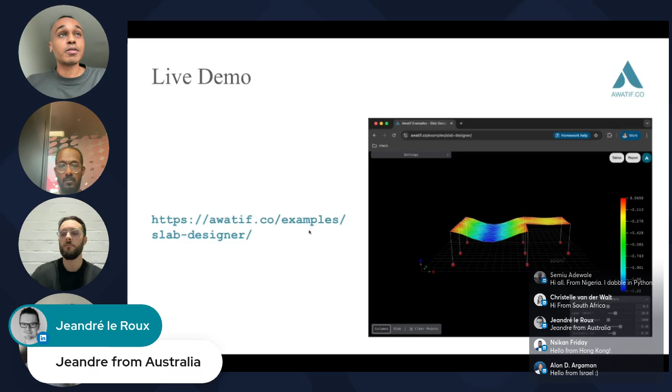The good thing about Awatif is it's web-based. If you just type awatif.co in any browser, even on your phone, you can access our app. There are many examples, like curves or buildings, but we have this slab designer which encompasses a lot of the ideas and concepts we want to bring. I'll go through it a bit faster than usual.

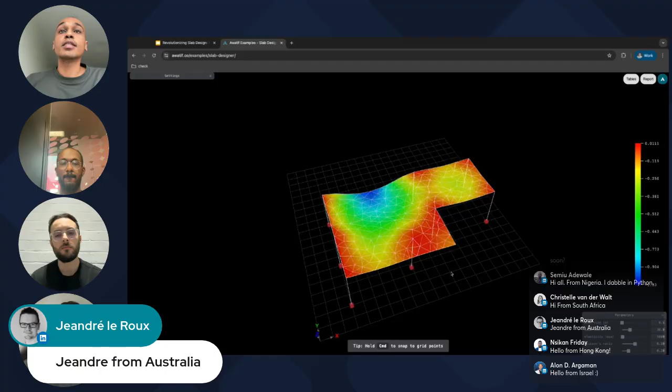This is a slab supported on columns, and here I'm showing the deflection in the Z direction - typically one of the first checks you do. The nice thing about this platform is that if you change the column location, the analysis is done in real time. We're talking about FEM analysis here - this is an accurate result, and you get it instantly.

The same goes if you want to look at the bending moment of the column. You can see here where the reinforcements are, for example, and if you change the column, you can see how they change in real time.

This is what we call manual modeling, because you're using the mouse, but you can also use parameters - here I'm changing the mesh size, I can change the loads. A more interesting example, which we don't have here, would be if you have drop panels and need to change from a drop panel system to a flat slab - you can toggle the system, and it's done automatically through a parametric way.

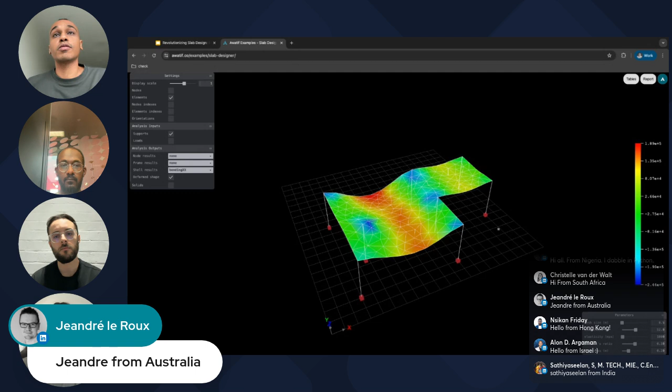This is something you can easily do with JavaScript, because you can see here the source code of the whole application, and you can extend it the way you want because it's open source.

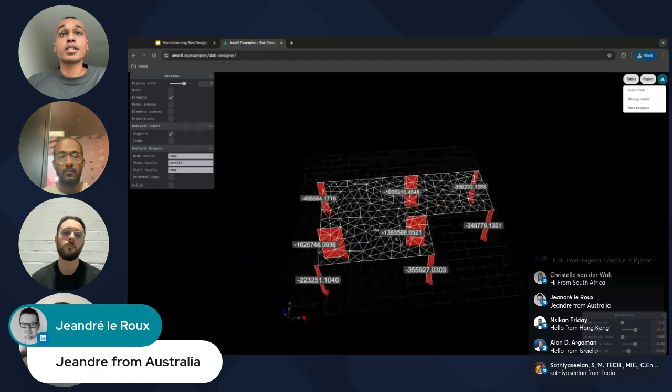Another thing - you can also look at the normal forces at the columns in real time. So if you add a column in the middle, you can see how this affects the other columns, which is very handy if you're designing a building.

Lastly, before I forget, you can also draw a new slab. So here I'm just gonna draw a new slab to show you - you can first draw the columns, then draw the slab, and you still get the real-time analysis.

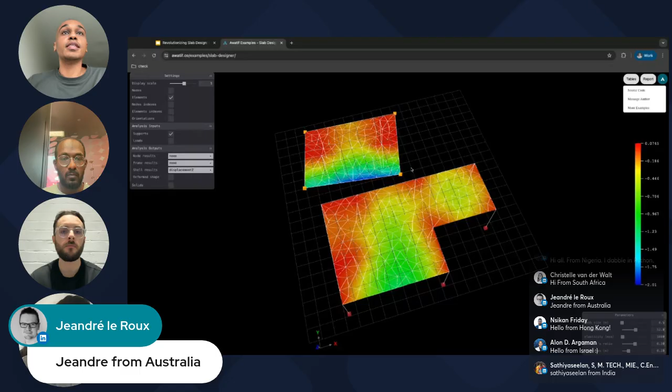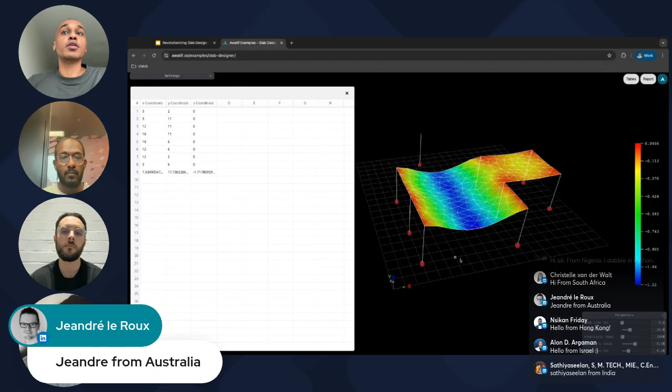One important point: you have full access to the data through these tables, so whatever you add here will be shown. Let me just clear what I did. These are the columns - if I add a column here, it's shown here automatically. The same goes for the slab.

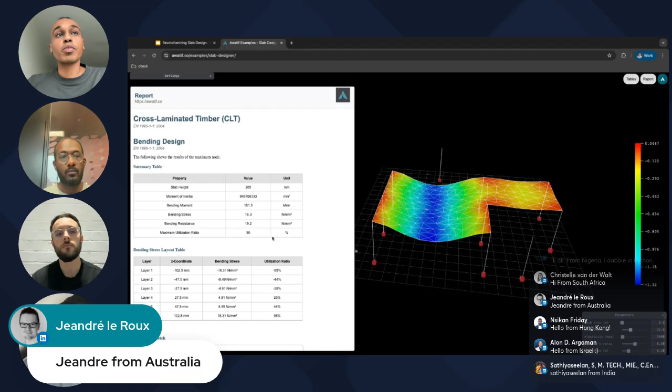And you get a report, which is highly customizable. Here we have a sample for CLT designing for bending, and if you see the utilization factor here, that gives you the strength of this slab. You can increase it until you reach something below 100, and you know the capacity of your slab. This is done in real time.

You can actually export the report for the reviewer or other parties to use in your design. I can talk about this demo forever, but let's keep it short - just play with it, it's online here, and let us know what you think. Going back to the slide now.

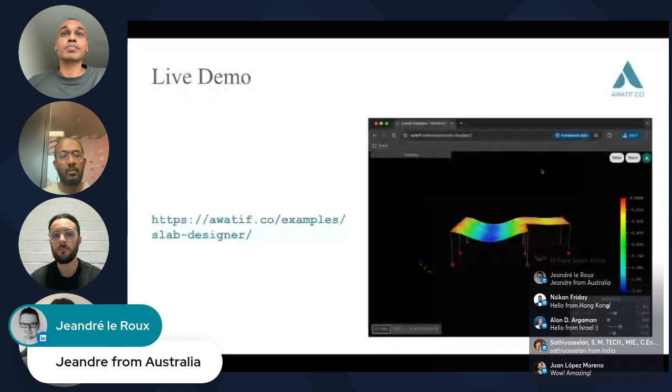So now I'm going to share with you the story of why we are doing this. As I told you, I was working in Qatar, and I participated in this high-rise building project, designing the penthouse of the owner at the top floors. The architect prepared all the layouts, and I spent 2 to 3 weeks designing the slab, the columns, how everything fit together. Then one day the architect told me, can we change the layout, because the owner wanted to change the layout. And I just realized my 3 weeks of work had gone to waste.

This is a typical process in many structural engineering firms. The design changes most of the time, and you need to redo your work, and this is very inefficient. I remember after the second iteration, the architect again told me, oh, can we have a swimming pool? I'm like, seriously? So this is why we need to do something better.

And we decided to work on this platform, which we call Awatif. To talk more in depth about our problem exactly, we are using multiple software to do the design, and basically our data is the same. This data has to be moved between all of these apps, like you do the analysis in ETABS, or you do the design in other software, use Excel for reporting. This manual process of transferring the data is error prone. If you make any mistake, that means you need to redesign. And if the design changes, that also means you need to invest a lot of time. This is the bottleneck in general.

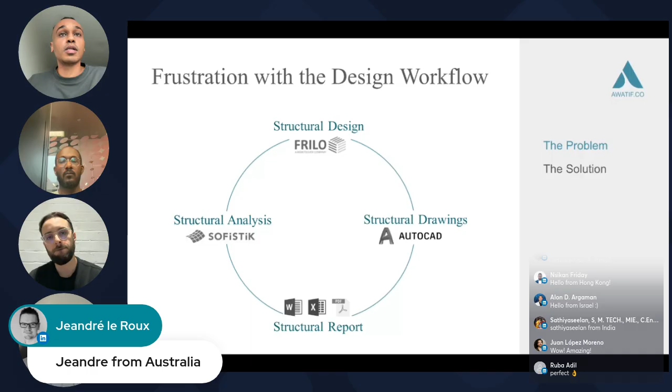There are ways to solve this kind of problem, like with Grasshopper or Dynamo, where you can write your geometry in a scripted way that allows you to change instantly, but we still rely on other software to do the analysis and the design, and this is very time consuming. Also, with Grasshopper, Dynamo, or visual programming, the code can become very messy, to the level that the owner or author of the script cannot read his own code if it gets too messy. So it's not a very scalable solution.

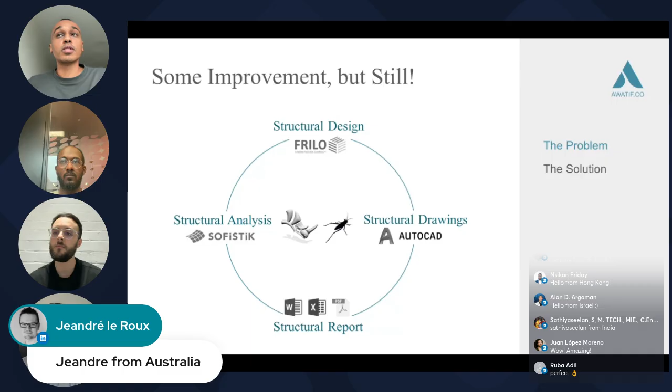This is why we decided to use languages like JavaScript, which is script-based and allows you to abstract your concept into different folders. We also remove the need to use other software. We can do all of this in one app, similar to the example I showed you. You can do the FEM analysis, the reporting, all in one memory or in one system, and that is very efficient. That also allows you to do optimization, where you can run thousands of iterations with these parameters, which is something very difficult to do with the manual process or with Grasshopper.

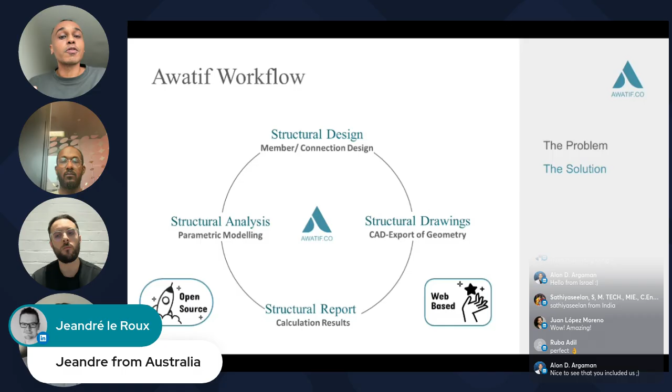These are heavy processes. And on top of that, it's open source and web-based. I cannot stress how important these are, but you can just look at what Google Sheets did to Excel, what Figma did to Photoshop. We are following the same trend and trying to modernize how we design buildings.

Finally, we mainly say Awatif is parametric modeling, but this is not the only area we're focusing on. There is also the optimization algorithm, so we're allowing the engineer to ask questions like, what is the most efficient system we can use, like a lateral system. Then the algorithm can run thousands of iterations and give you the best design. Also fast solvers, this is something we really need, because if the FEM analysis takes weeks, how are you going to do optimization with this? We're also working on this, and there are some novel ideas on how to make them fast, which we're going to talk about maybe in next webinars.

That's it, sorry, it's a lot of talk, but now let's shift to Kaison so he can tell you more about the modeling aspect.

One second, let me change the screen. Yep, sounds good. Yes, here is yours.

Okay, perfect, thank you. Moving on to our next section, modeling.

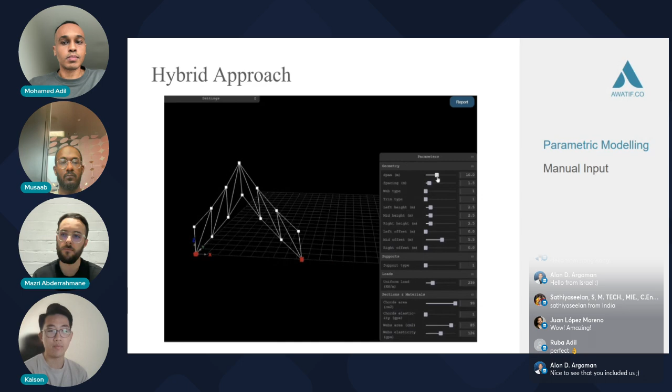Mohamed mentioned earlier that at Awatif we're a strong believer in the power of parametric modeling. We can take the Truss Designer as an example. Here we have a fully parameterized app, nearly every single variable is parameterized, like for instance your span, spacing, web type, etc. You can imagine it would be very convenient whenever there are changes in your design requirements, your layout, etc., and like Mohamed mentioned earlier, it happens very often. So with our slab designer, that's the first thing we went after, to keep this parametric modeling principle in mind.

Here we have exposed things like mesh size, load, other material properties, and the thickness of our slab. By doing so, it allows us to optimize our structure quickly, and allows designers to scale the design easily for different design scenarios, like if your load changes.

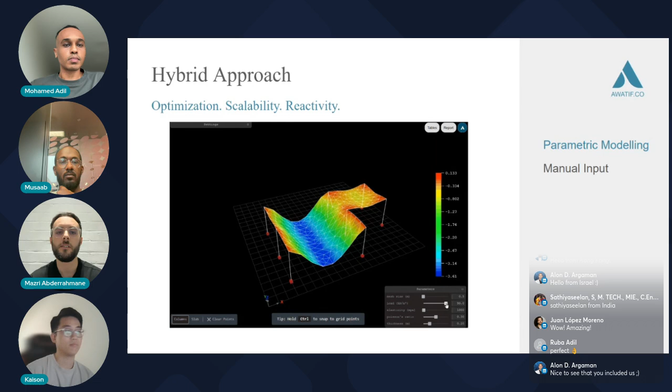Say if you want to add a drop panel, a different type of structural system, you'll be able to do that through this parametric approach. Coupled with our fast solver, this allows the design to really be reactive. You'll be able to get real-time results according to different design parameter values. So that's the power of it.

However, we soon realized that there's no one-fit-all solution when it comes to modeling. I think from a user perspective, what users are looking for is flexibility. We want to give people as many options as possible.

So here we've embraced a hybrid approach. We want to provide users with a manual way of inputting other parameters. For instance, here you can move your columns around through the graphical interface, and you can also adjust the column coordinates and redefine coordinates in a table format.

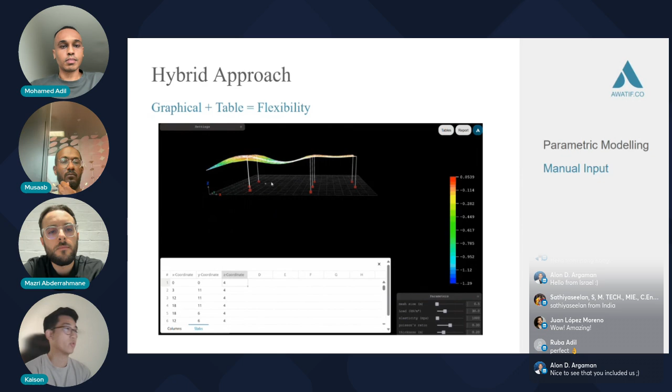By embracing such a hybrid approach, we want to give as much power and authority to users so that they can have full control of their design without having to juggle between some inefficient user interface, which we as designers face day to day in our workflow.

So that's all about modeling. Moving on to our next section, meshing.

As we were developing Slab Designer, we came across a challenge: meshing. And when it comes to meshing, there are two folds of it. First is how do we represent these models, namely the high-level object and low-level object. I'll explain what high-level and low-level object refer to, and how we convert between high-level and low-level objects.

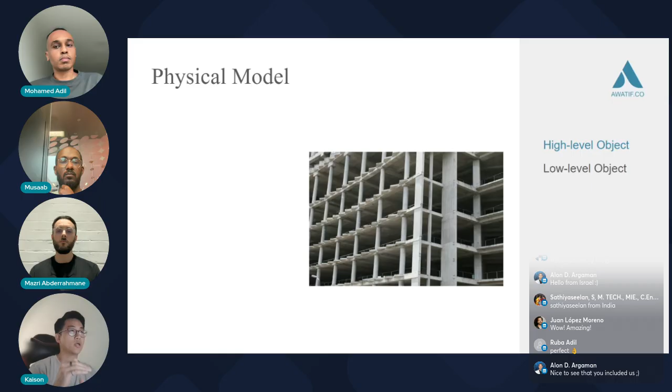In terms of Slab Designer, the high-level object would be a physical model, in this case a single story in your building. With the Slab Designer, we've divided up the single story into the slab component and column component, similar to how you would define your building structure in other BIM software.

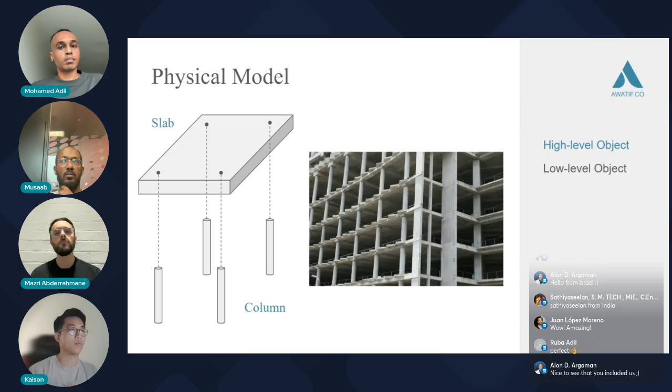Doing so allows data interoperability, say if you are working with other software, and that's something that we are trying to achieve as well here at Awatif.

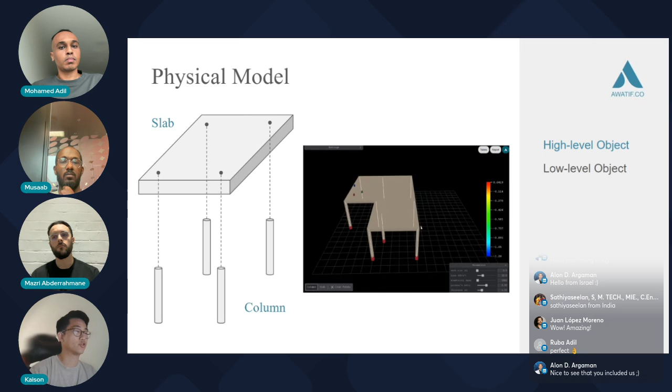So within Slab Designer, you'll be able to visualize the slab and column like what you see here as well, not just the analytical model.

After that, we have implemented a meshing algorithm that converts your slab and column into shell and frame elements. This algorithm is robust. It allows you to, wherever you place your column, merge it with the slab as long as the column lies within the slab boundary. Say if you define a new slab, the same thing applies.

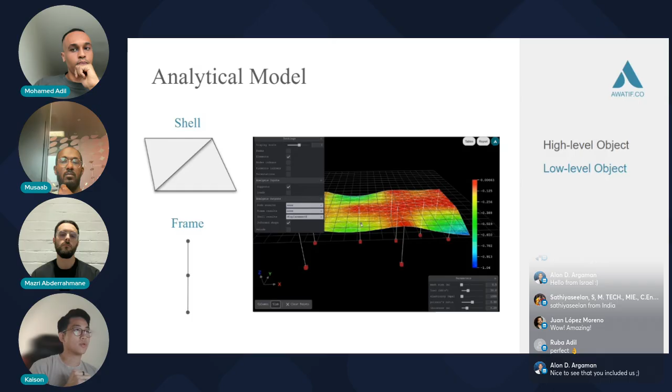This really provides flexibility and harnesses the power of a real-time FEM engine, allowing you to do analysis quickly and in real time. So that's all about the modeling part. I'll pass it on to Musaab for analysis.

Yes, thank you Kaison. I'm going to talk a little bit about the analysis, specifically our new shell element formulation, which is based on Reissner-Mindlin shell theory. I'm not going to bore you with a lot of math, just give a very high-level explanation.

Each node has 6 degrees of freedom: 3 translations and 3 rotations. The powerful thing about this element is that it eliminates a lot of numerical problems, so to say, for example shear locking. If you're interested, you can read more in the paper that we based our shell modeling on.

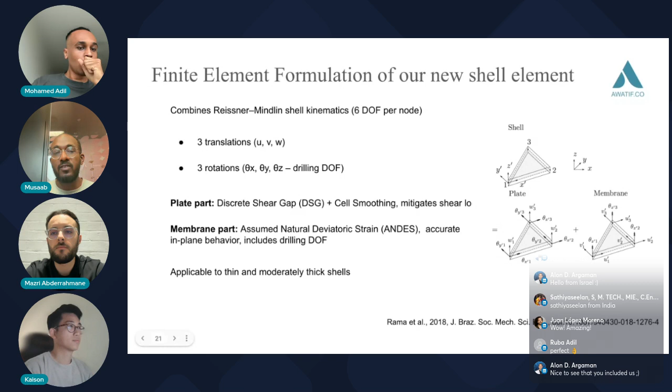Basically, the element stiffness matrix combines two parts: one related to the membrane stiffness, and the other related to the plate stiffness. So in general, this is a very high-level overview of how we developed this new shell element.

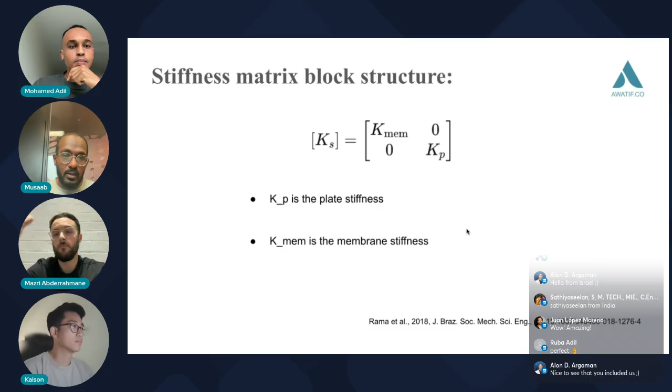As Mohamed showed you in the live demo, it is very fast, very robust, and can give you results in real time. As you change the loading, geometry, and different parameters, you get real-time analysis. So it's really powerful, and of course it's very important to validate such modeling techniques.

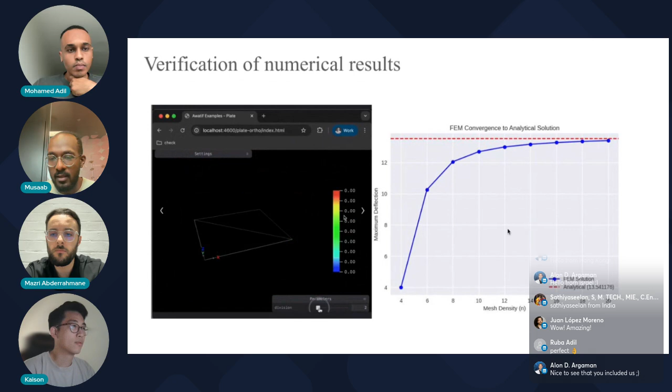So here we see a simple mesh study. As we increase the element density, we see that the numerical solution approaches the analytical solution, and this is in very great accuracy, I would say.

And yes, this is all about it. If you are interested in knowing more about it, please don't hesitate to reach out to me. I can give you some more hints.

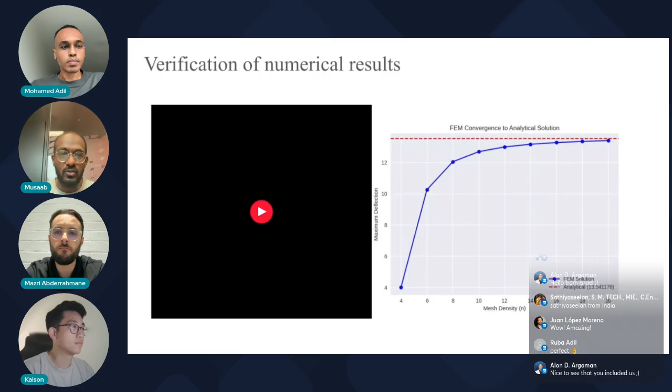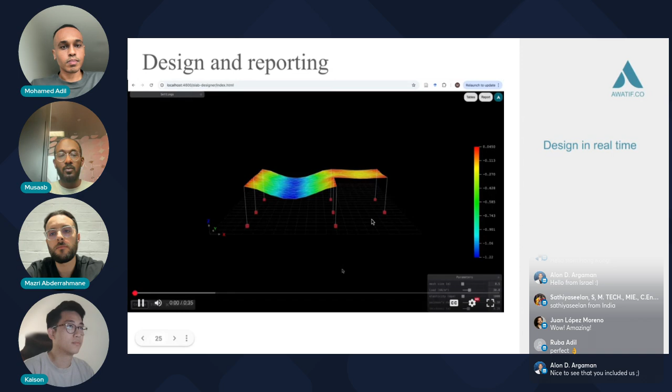Of course, after analysis, it's very important as structural engineers to do the design and the reporting. As Mohamed showed in the live demo, we have this report, and the analysis is done in real time. As you change the different parameters, the utilization ratio and all other analysis-related properties are changed in real time, so you don't have to run, analyze, and then wait for the analysis results again.

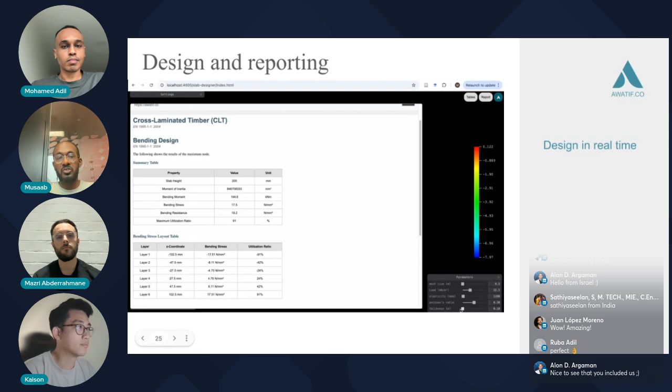And the same as well, we have the report here. It is fully parameterized, and you can change everything in real time, and eventually print it as a PDF. So this is really fast compared to using conventional reporting and design tools, where you would have very long Excel sheets. We all agree that this is boring, so we are trying to eliminate that.

So yeah, that's good. And now I give the mic back to Mohamed, where he's gonna talk about integration.

Maybe before going to the last section, a quick shout out to Niskin from Hong Kong, Alon from Israel, and Seth — oh, that's going to be a difficult pronunciation — Sathiyaseelan, sorry if I didn't pronounce it, from India. It's nice to see you here. And yeah, let's move on with the last session.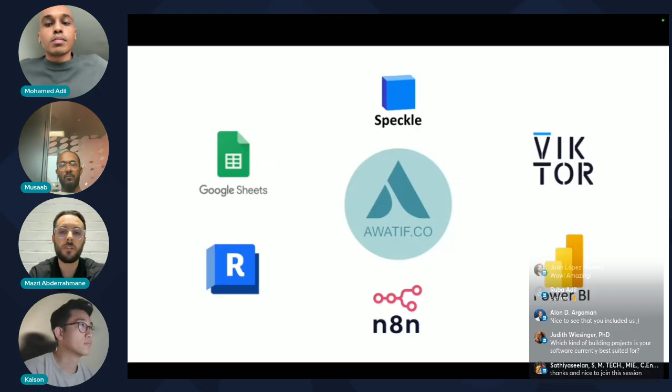So as you can see on this slide, we have a few examples. Awatif can sit inside VIKTOR apps to provide instant structural checks, or run directly in Google Sheets, where engineers calculate and visualize results in a shared spreadsheet. The same engine can feed results into Power BI dashboards for reporting and decision making. It could be used to automate through N8N workflows to trigger analysis in the background, and even connect back into Revit or Speckle to enrich BIM workflows.

So basically, the bottom line is that wherever you're working, Awatif can plug in and give you both the analysis and visualization. Now I'm going to hand it over to Mohamed.